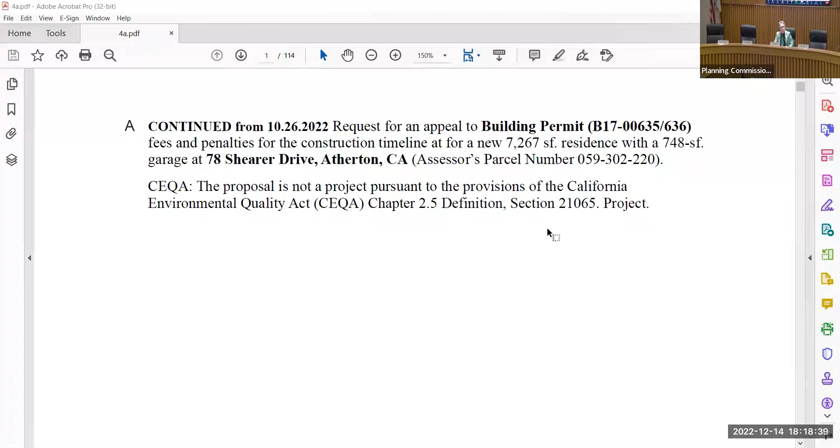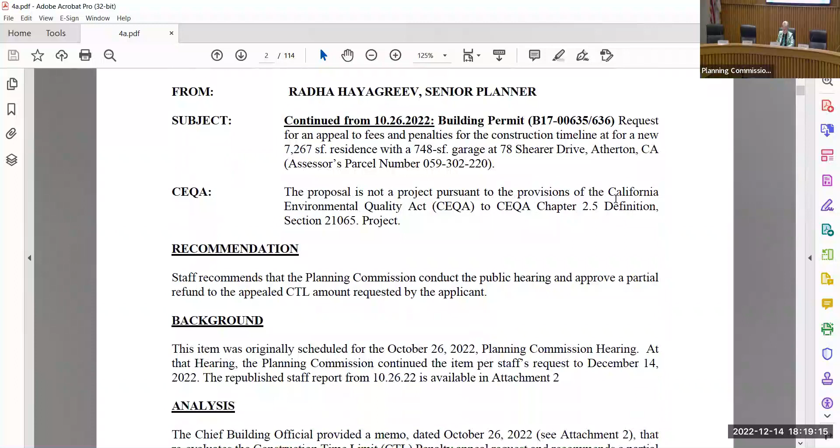Thank you, Chair Lane. I'm going to share my screen and walk you through the first item on the public hearing. The item is for an appeal to the building permit B17 for requested refunds to the fees and penalties of the construction timeline for the residence at 78 Shearer Drive. Staff had brought the Planning Commission report on October 26th. The chief building official is with us tonight to speak more about the project, its history, and the timeline. Tonight, staff recommends that the Planning Commission conduct the hearing and approve a partial refund based on the evidence and the revised memo the chief building official has provided for our review tonight.

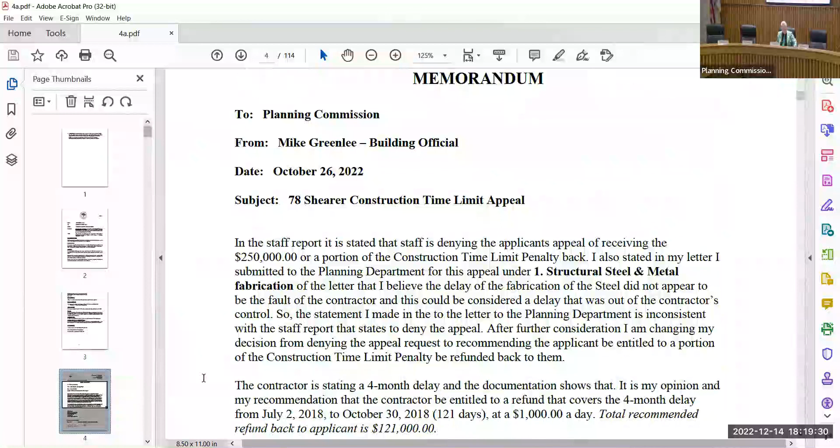The recommended request of the refund was for the entire amount of the $250,000 penalty that the applicant had to pay for exceeding the construction timeline pursuant to the Atherton Municipal Code.

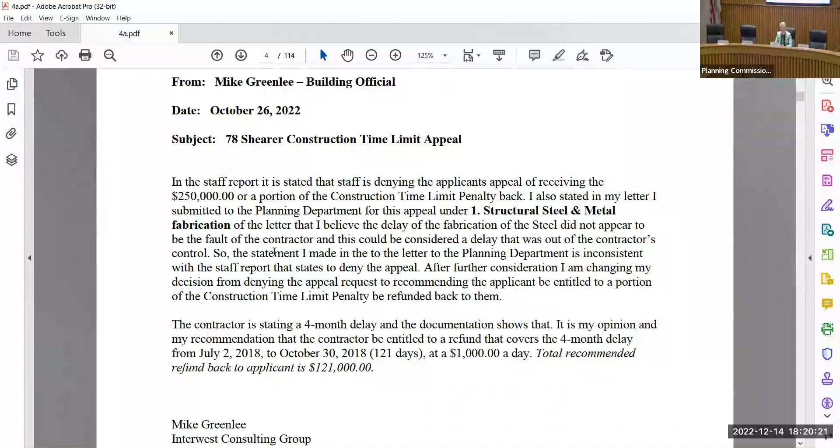The request is for the entire amount, correct. The chief building official's memo is in front of us right now, and his position on this project, after reviewing the evidence sent to him by the applicant regarding the structural steel and metal fabrication delays they had to incur, which was not their fault, is a revised recommendation. Rather than denying the appeal of the entire amount, he has recommended and approved a partial refund of up to $121,000.

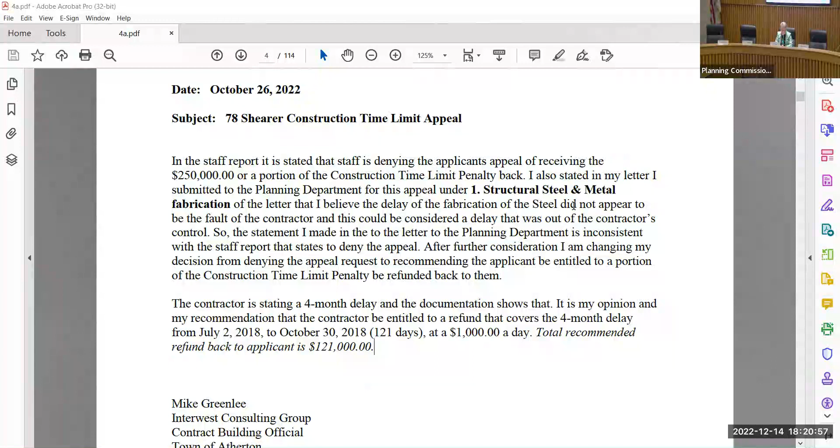Okay, hello, my name's Mike, hold on. Okay Mike, there you go. Yes, this is Michael Greenlee, go ahead and introduce yourself for the people in this room too. Yes, my name's Michael Greenlee, I'm the building official. Can you turn it up? We're not getting enough volume in the room. Just a minute, Mike. All right, go ahead, Mike, go ahead.

Good evening, my name is Michael Greenlee, building official for the town of Atherton. I've been the building official here for over 11 years. I've never been on site for this project at 78 Shearer, though I've driven by it. I've never met the contractor or anyone on site, so I communicate with the inspector about what's going on out there. This project is about 8,000 total square feet. It started in October of 2017, and the original CTL timeframe was October 19th, 2020. When COVID hit, we made adjustments back in 2020. Myself, the city manager, and the city attorney came up with a COVID-19 CTL update to allow a little more time, and for this project they got an additional 139 days to complete. But it went well beyond that, about 450 days past the adjusted CTL. With COVID, this project started about two years and four months prior to COVID.

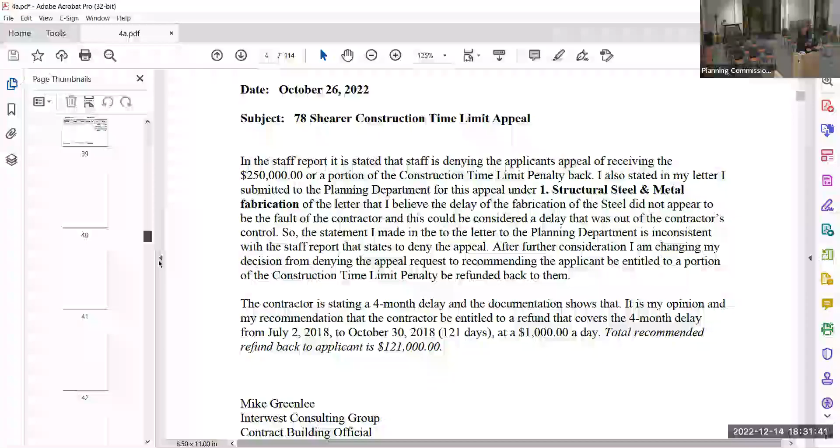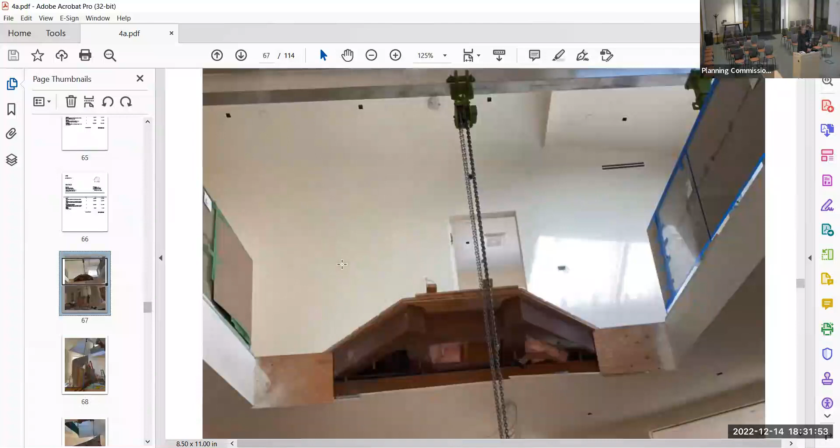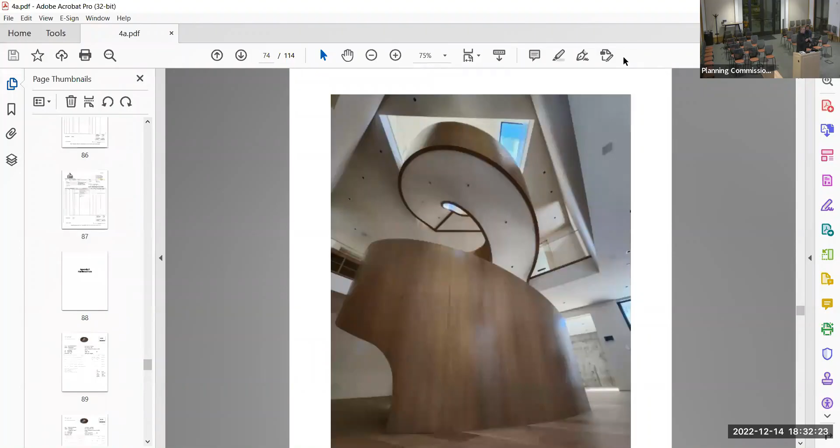Finally, in October of 2020, almost a year after the order was placed, they said they're going to ship this out in a couple of months. It finally got to the port in Oakland in December of 2020, 14 months after we ordered it. But the shipment could not get out of the port - it took a while.

Meanwhile, the installers were supposed to come from Germany, and they told us that because of COVID they can't get a visa. So we tried to request a special work visa for them from immigration, but that failed. So finally, they decided they can't come in, and we needed to find somebody in this country to put together that staircase.

It is an artistic piece - it's not something I could go in front of Home Depot, grab somebody, and have them put that staircase together. We looked everywhere in this country, and finally found a very small company, one person who's extremely artistic, who took on the job. He started it at the beginning of 2021 and finished by the beginning of 2022 - it took him almost a year to build.

I included some pictures of the process, of what that staircase looked like. Without that staircase being completed, we could not secure a final inspection. You can go up and down the stairs, but you can't get a fire inspection, you can't get a final inspection. So that's one of the things - all 7 things that I put in that package - that's one of them.

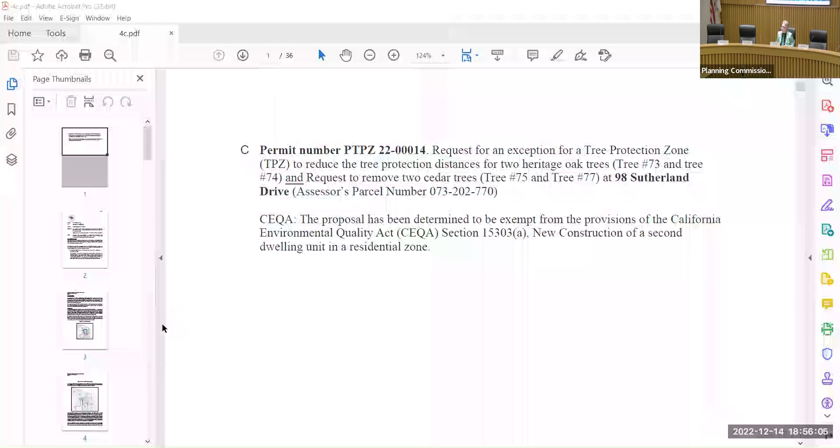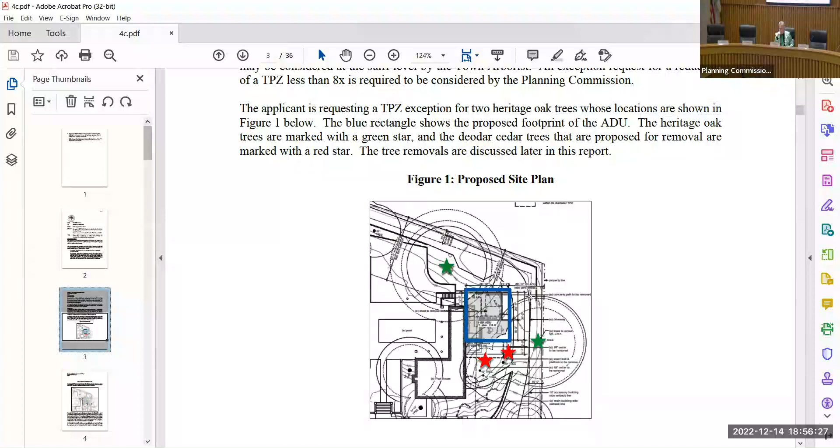I'm sharing my screen to zoom in on the particular project and the TPZ exception. What you see in front of you is the site plan. The rectangle shown in blue is a proposed ADU, and the project's location here is impacting two trees shown in green stars. The TPZ exception area for these two trees, which is impacting the structure of the ADU, is shown in blue on this map.

Town arborists met with the applicants multiple times, and planning teams have met with the applicants for various iterations for alternative location and possibilities. This seems to be the right spot for the ADU, however it is surrounded by trees. The applicant is also requesting removal of the two trees shown by the two stars.

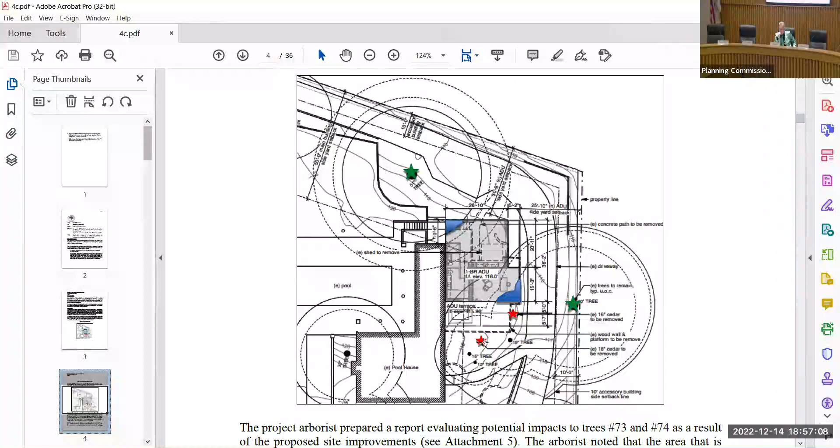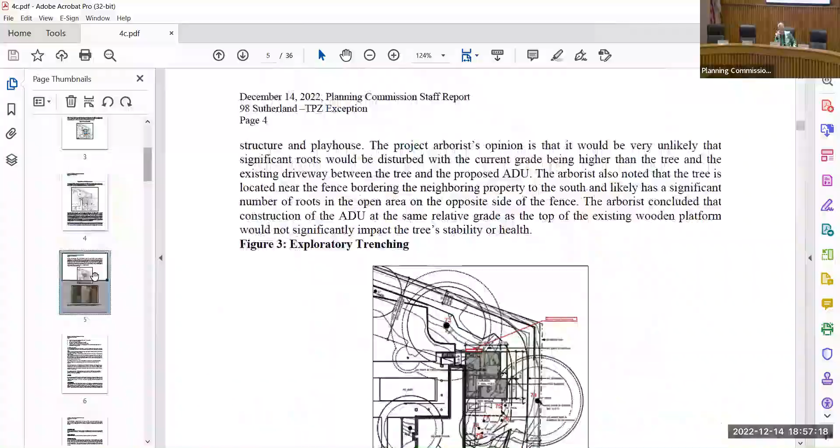The town arborist has reviewed the applicant's arborist report and also paid a visit to the site. There has been exploratory trenching to give her the information she needs. She's with us tonight to speak about her recommendation, and I can summarize.

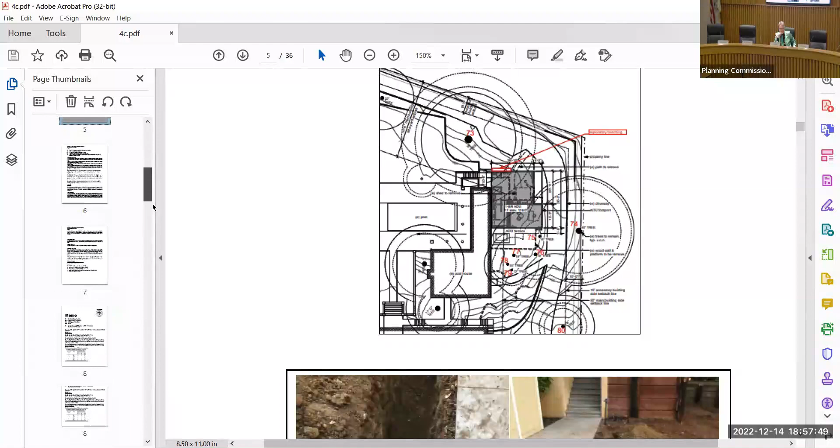She approves the TPZ exception of these two trees, number 73 and 74. She also approves removal of one of the trees, but she denies the removal of the other cedar tree. I would like to hand over the mic to Sally to speak more about this item. Planning staff is backing the town arborist report and recommendation at this point to the planning commission.

All right, Sally, you want to go? Yeah, so I felt I could recommend the two TPZ zones because one tree is across the driveway, and the other tree is further away and down the slope. There's also an existing platform in the location where they want to build this.

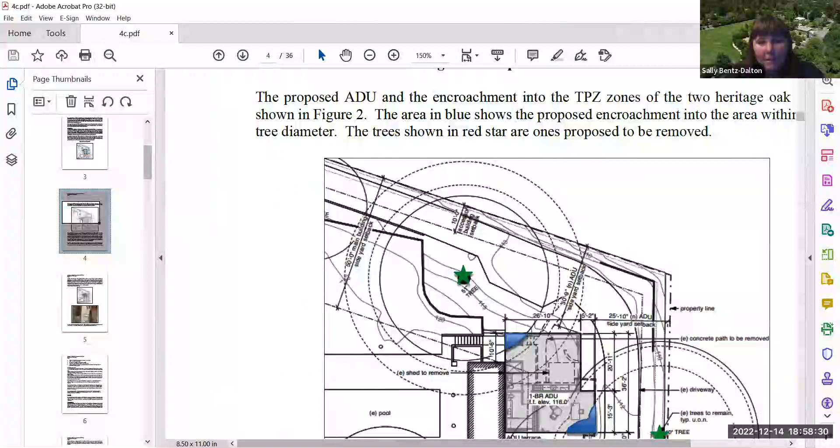So you'll see on the plan, the tree to the right, the green star, that's across the driveway. The other one is down the slope. I don't know if you can see on the plan, but there is an existing platform here with the new ADU.

I think they only found one root, which was a 2-inch root. So they didn't find any large roots when they did their exploratory trenching.

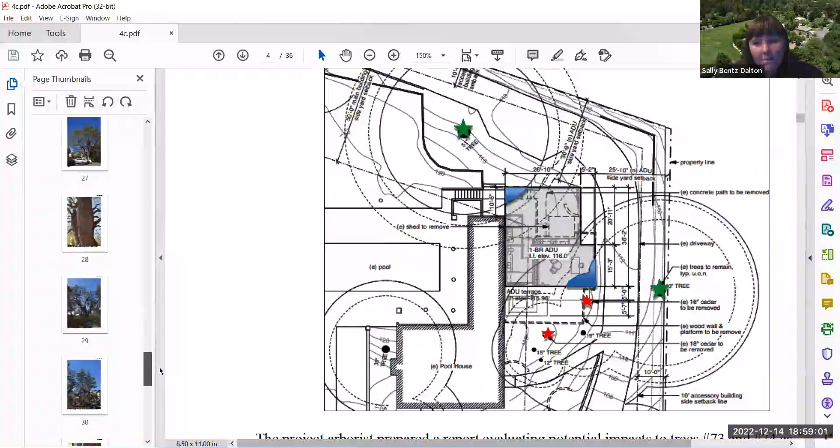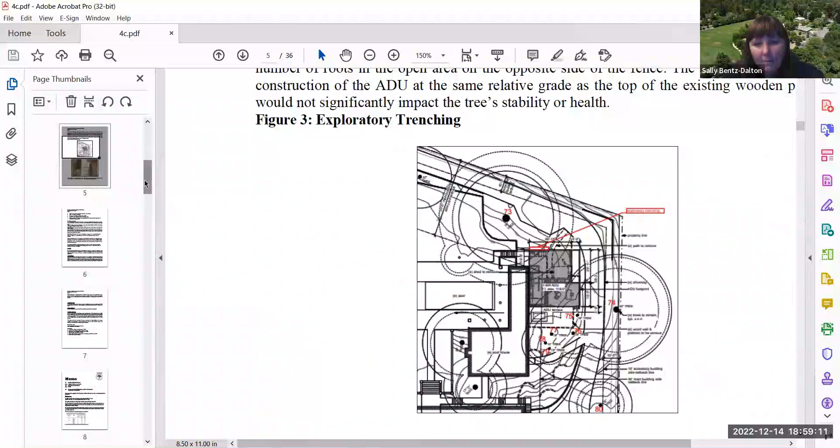The square footage of the ADU was larger, but to comply and make it no less than 6 times, they made the ADU smaller. And that's the...

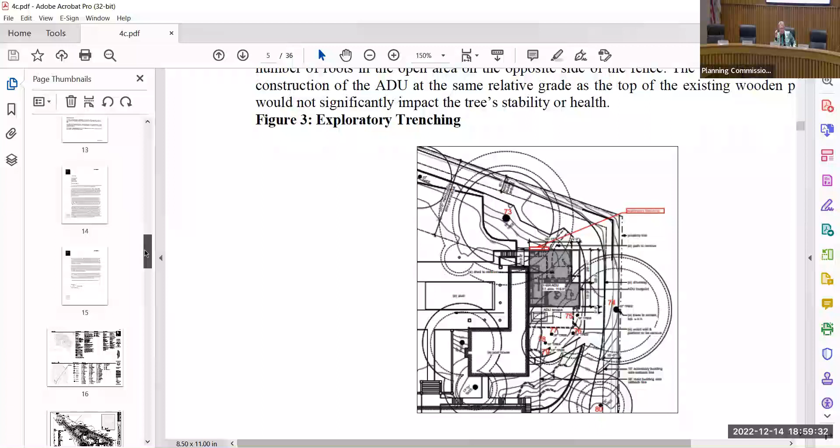The 6 times is because of tree 77, or because of one of the green trees? I think it was for tree 70, the one to the far right. Okay, 74 or whatever it was. Okay, yeah, all right.

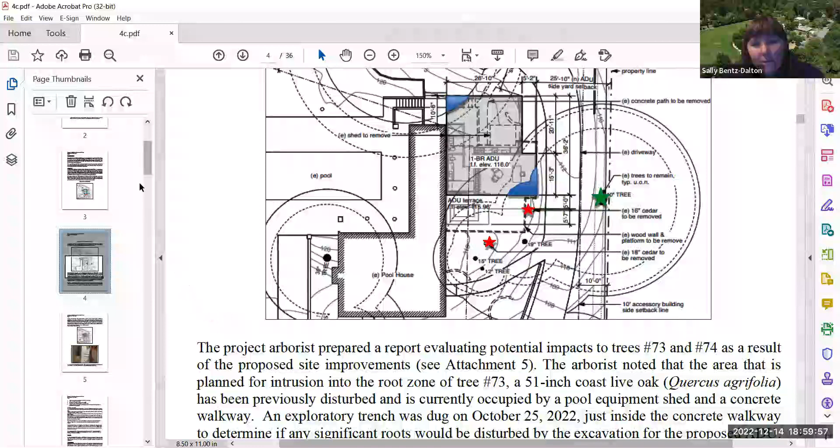The tree I denied is 10 times away, so they don't need a request for that one. The reason I approved the one tree is because most of the foliage is on top of the tree, it's top heavy. The vigor was less than the tree that I didn't approve. It's pretty crowded over there, and it's also right next to the driveway on a slope. So I felt that one could be approved.

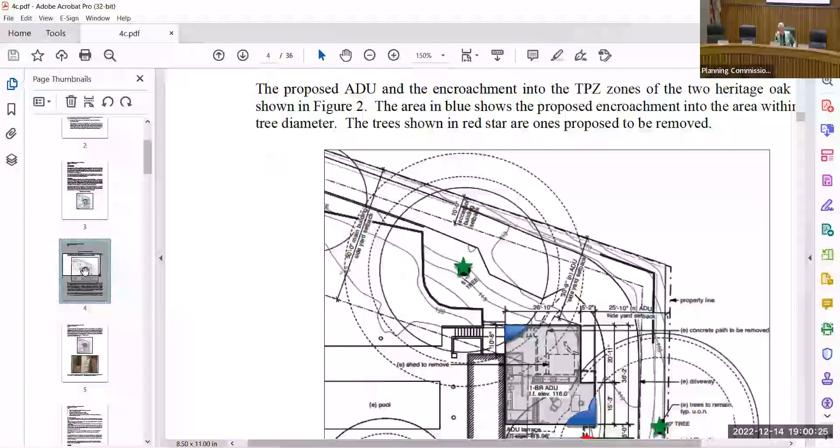So I had a question on tree 77, the one you wanted to retain. It looks like it's awfully close to the existing house, and it doesn't look like it's going to be anything other than a top heavy tree, because no branches can actually grow down low due to the house. So it looks to me like that's a poorly placed tree as it exists.

Yeah, I mean, if they're going to have a reason because it's too close to the house, they would have to show some type of damage to the house. So in this case, I just didn't feel they had a strong argument to remove the tree. But of course, if you visited the site, you would see that it is close to the house.

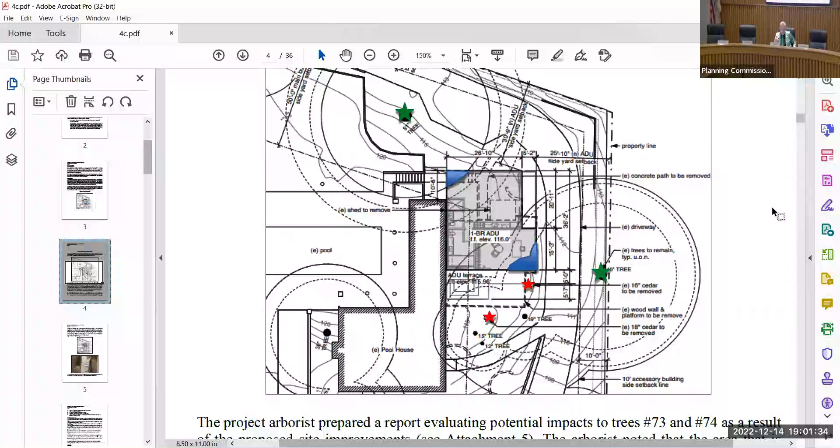What I'm thinking about is there's two things about it: the proximity to the house, which is an issue with coming fire codes and things like that, but I'm also looking at whether the tree will ever actually be healthy, because of the way it has to be shaved over halfway to keep it from impacting anything on the ground, just to have a top that's sitting there looking like a tree, with the bottom looking like a stick. It's never going to be a healthy tree, even if it's existing okay, right?

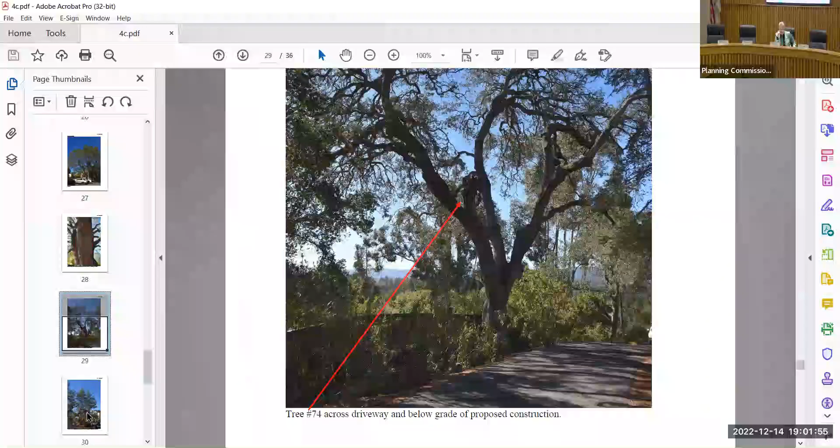It would never be able to have full balance to it, is that correct? I mean, it's more balanced than the tree that I approved, but yeah, they also pruned it up, which isn't always best for the trees either, because then they're less balanced. As it's standing there today, it's something I wouldn't typically approve.

Okay, all right. Any other questions? Did you have anything else, Sally, that you wanted to cover on that? No, that's all. In this picture, you can see the platform that's existing there with the fake grass on top.

And that kind of grass is pervious, right? The water flows through that, so it doesn't stop water from going to the roots, right? It's supposed to, but it's not as permeable as you would think. That's why I asked, because I know some of them aren't as free flowing as they advertise.

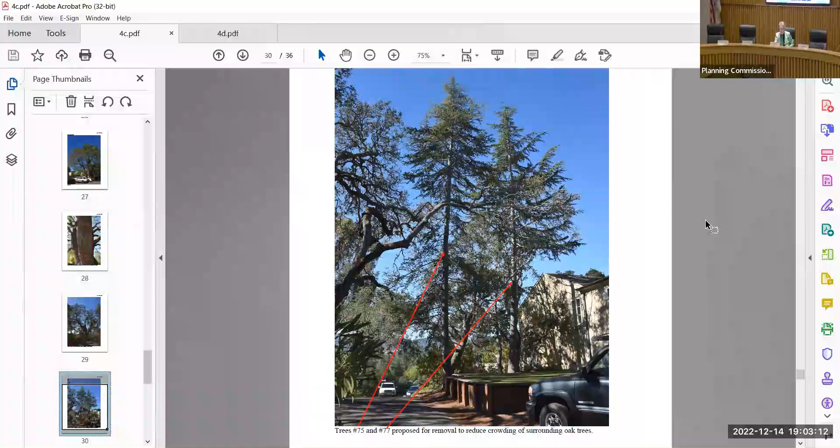All right, any other questions of staff? No, thank you. All right, then I'll go ahead and open up the public comment section. We'll start with the applicant. Where is the applicant?

Hi, this is Maurice Lombardo with Taylor Lombardo Architects. Oh, there you are. Hi, I can see everybody now. Love the tie, by the way. Happy holidays.

I think Sally did a great job presenting this, and we did a lot of research, looking at every possible site for the ADU. We think this is a perfect site location for it. And I agree, those two cedar trees would be great to remove both of them, because there's a lot of vegetation and trees already around this property.

The elimination of those two trees, I don't think would impact the amount of landscaping that's there right now. We'd certainly be up for adding additional landscaping beyond the driveway toward the fence. We did a lot of work analyzing this. We think the ADU looks good, and with the removal of those two trees, I think it'd be a benefit for the ADU. And this is Fanny, who also worked on the project with me.

I just want to add, one of the main reasons we suggested the cedar tree removal is so that it gave us a little more room to create better landscaping in terms of screening for the occupants of the ADU.

Right now, it's really hard to do anything other than low-level shrubbery. Any mid-sized planting just gets crowded out by the existing vegetation around there. So we're trying to clear up the space a little bit and help with the pool house maintenance issue, because it requires quite a bit of maintenance. I think the owner and the previous owner have been doing that, but it is very close to the existing pool house, so it will be very helpful.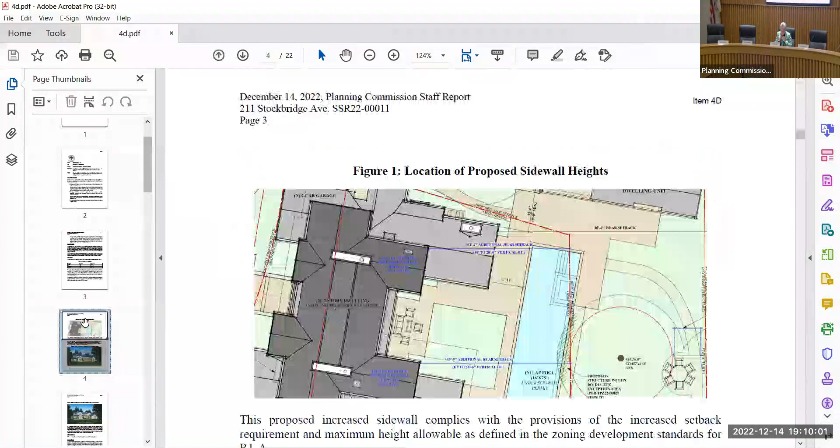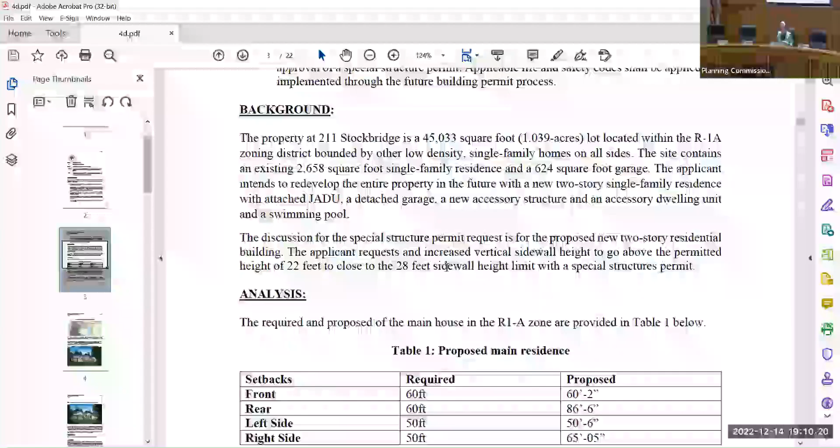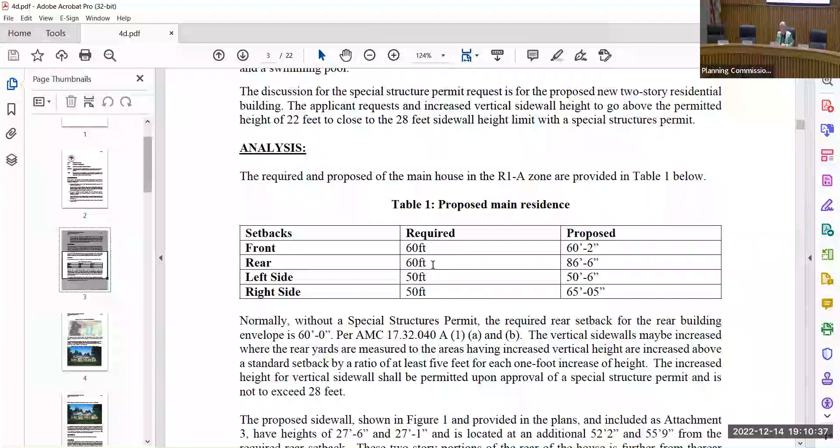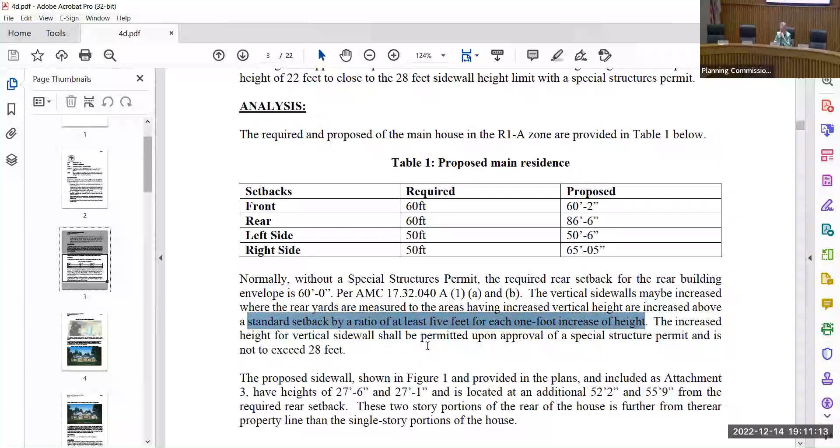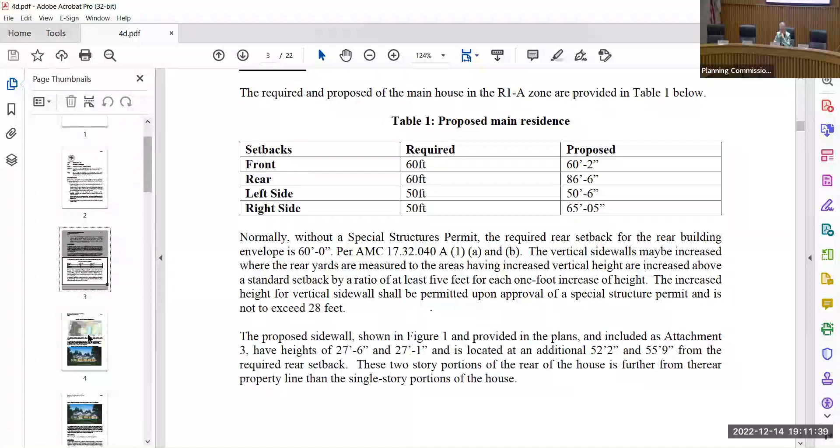The standard ratio that the municipal code recommends is: if the sidewall height needs to go taller by 1 foot, they have to provide over a 5-foot increase in the rear setback. The maximum allowable sidewall height without the special permit is 22 feet, with a 60-foot required setback. However, the applicant is seeking 27.5 to 27.1 feet, which is about 5 feet taller than the maximum allowable sidewall height. They are complying with the required increased setback.

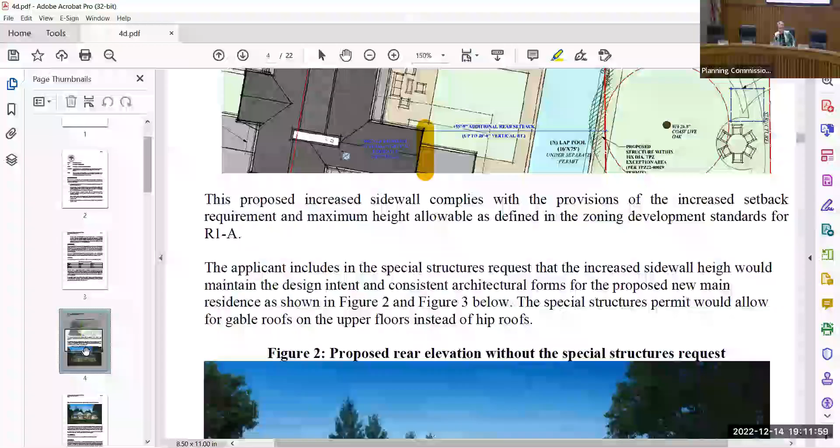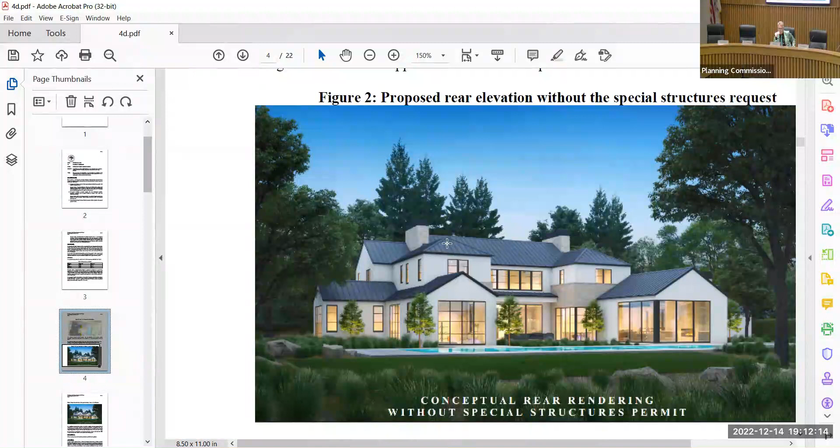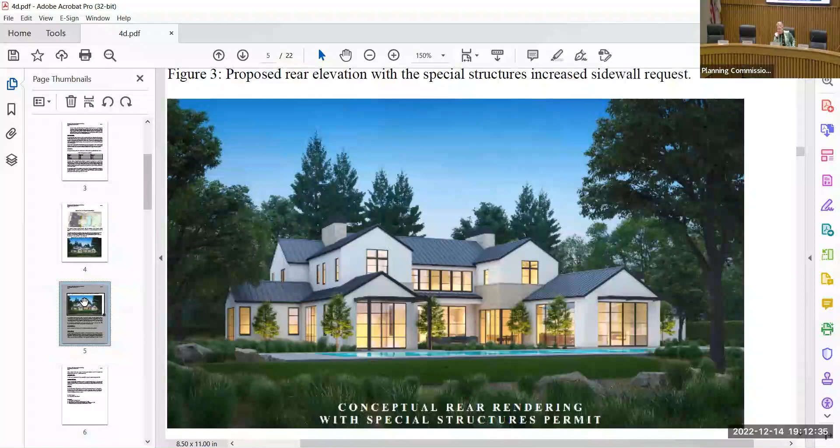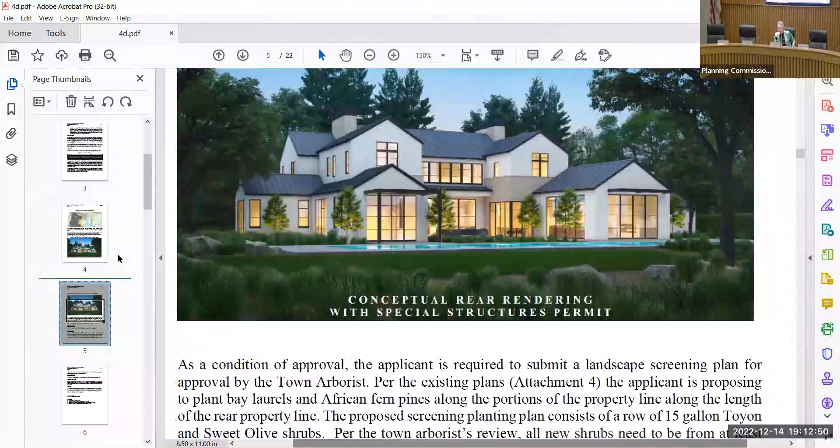When we visited the site and looked at the neighboring properties, one issue that came up was that, if the planning commission approves the higher sidewall, staff is requiring the applicant to submit a landscape screening plan, because this property line at the far end has visibility to the neighbors. The applicant has provided a landscape screening plan for our review as part of this item's attachments. However, the town arborist recommends that the applicant work with her to revise the screening requirement to conform with the heritage tree ordinance requirement.

The current screening plan proposes 15-gallon shrubs. The required size is a 24-inch box. Staff concurs with the town arborist's review.

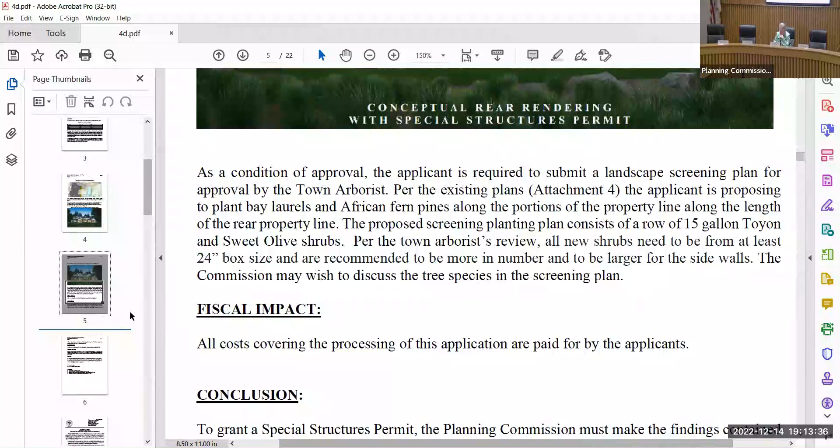Based on what you see and what you've heard, staff is recommending that we approve this rear sidewall increase to maintain the architectural integrity of this design. And that ends my presentation.

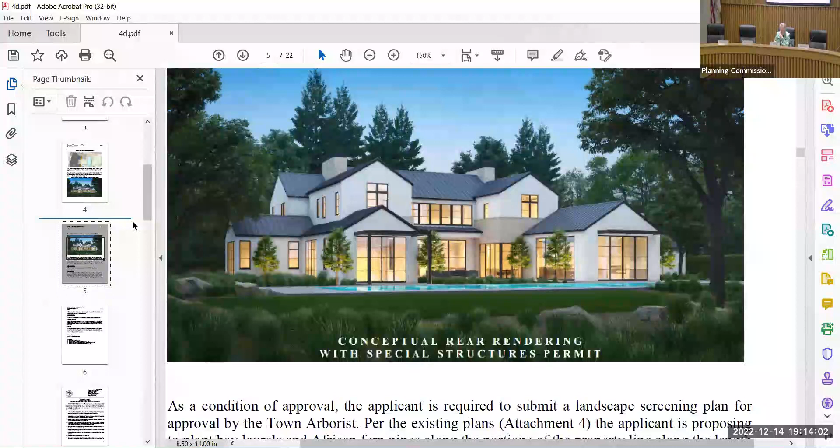We have the applicants here with us on the call. Do you have any questions of staff on this one? No, thank you.

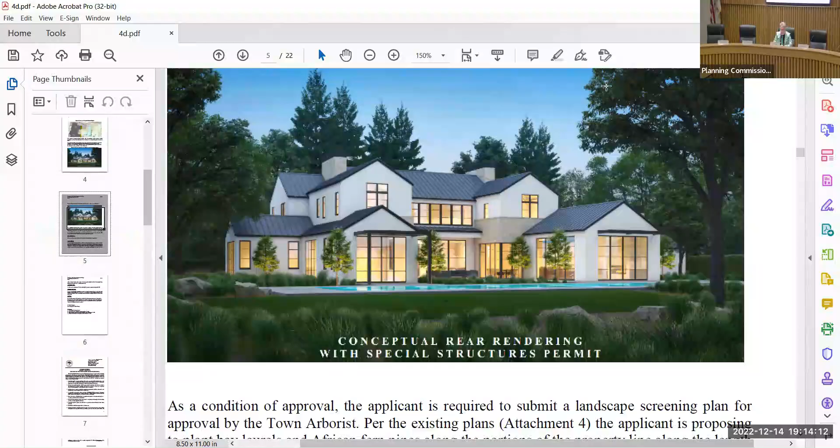We'll hear from the applicant or the representative next, so I'll open up the public comment section. Good evening, Mr. Chair and members of the commission. My name is Steve Simpson, I'm the architect for the project. Can everybody hear me okay? Yes, Steve, thank you.

I think staff did a great job of explaining it. I just want to expand or reiterate: what we're really asking for here is just to change two elements, the roof line. The walls don't get any taller and the house doesn't get any taller with this proposal. We originally developed the house like this and had a different interpretation of the architectural projection zoning aspect, and found out staff's interpretation was a little different. So in order to conform, we changed those two elements to a hip roof, but we'd really like to do the gable roof because it ties the whole house together better. So the overall house does not get taller, the walls don't get taller, the ceilings don't get taller, nothing else gets taller. It's just a change from a hip roof design to a gable roof on those two elements. I'm happy to answer any questions.

I don't have any questions. Any questions? No questions, thank you. All right, anyone else here to speak on this item? I don't see anybody popping up.

Go ahead and close the public comment section and bring it back to the commission for discussion and action as appropriate. This one looks pretty straightforward to me. The setback takes care of it along with the screening, so I'm fine with it.

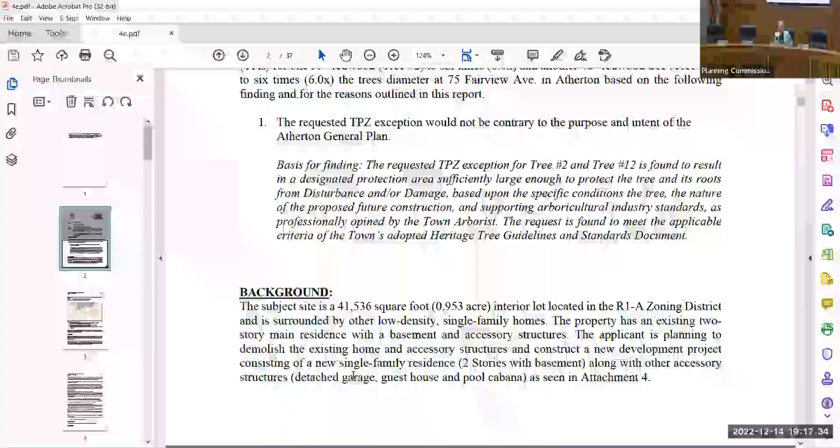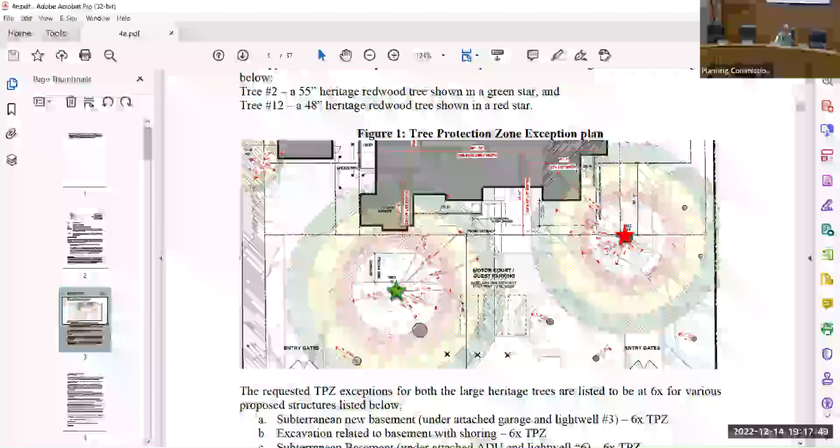Thank you, Chair Lane. This is a TPZ exception at 75 Fairview Avenue. This is an incoming project for a brand new residence—this is an incoming project for an ADU, I'm sorry, my bad. The ADU proposed is shown and hatched in the plan in front of you, and the tree protection zones are for these two trees as highlighted. I would like to invite Town Arborist Sally to speak more about this project because she has had more detailed discussion with the applicant. We do have the applicant on the call too.

All right, very good, Sally, take it away. You might be on mute. Sally, can you hear me? Yep, now we can. About a year ago, you looked at one similar to this one. This is for two TPZ exceptions, for tree number 2 and tree number 12.

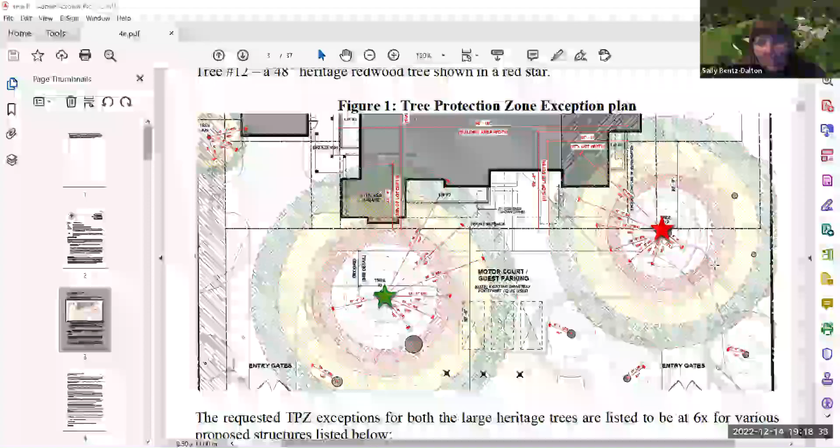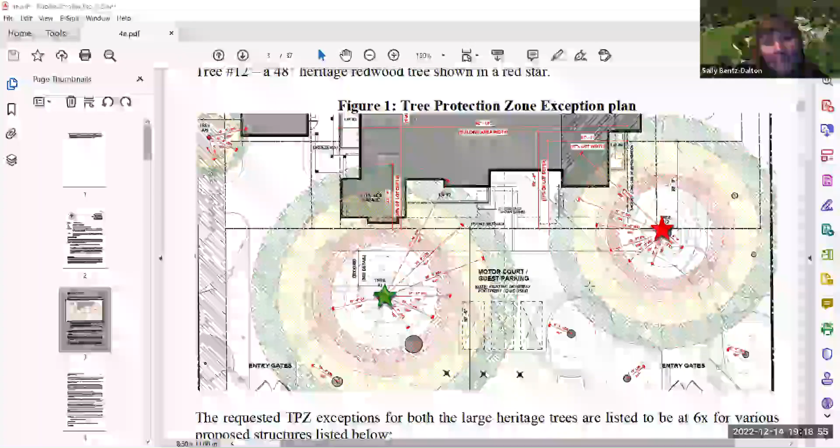The existing house is closer to where these two large redwoods are located. These redwoods are pretty big, so I feel like it would be hard to build anything without asking for an exception. And again, the existing house was

approximately 10 feet closer to the trees than what they're asking for. The applicant will do shoring in the locations at 6 times, so they don't have to dig closer than that.

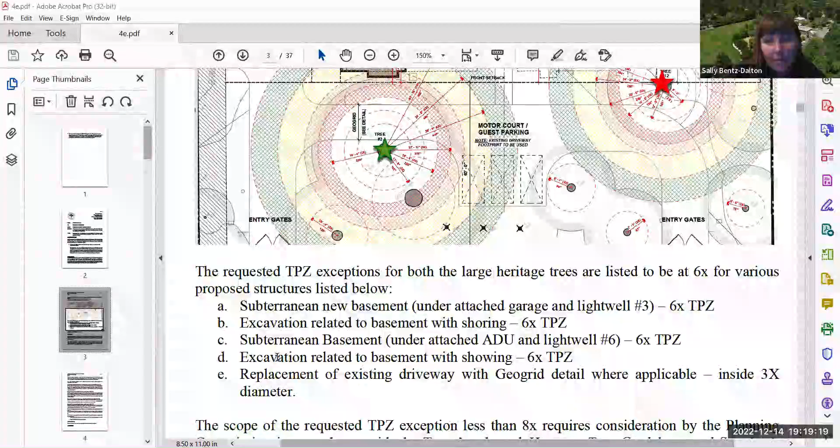And if I recall, underneath the attached ADU, light well number 6, only one root of 2 inches was found. And then in the other location, no roots over 2 inches were found.

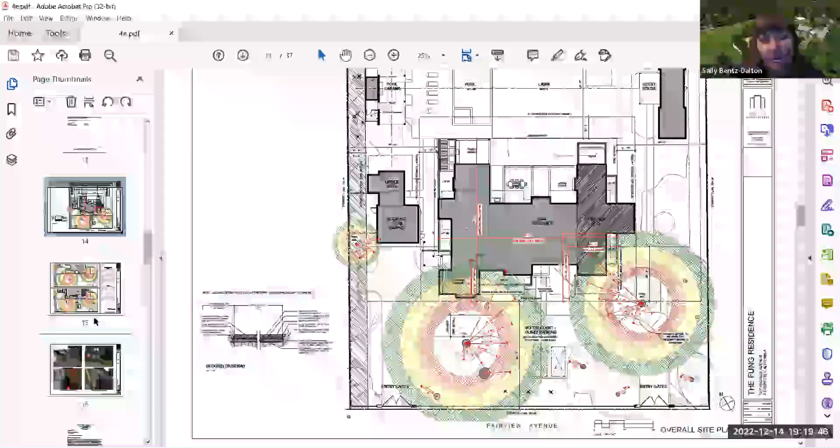So I think overall, because of the location of the existing house and because of the techniques they're going to use, which Sean can talk further about, and because the trees are so large, I felt like it was okay to approve this at 6 times. Typically, I wouldn't approve something at 6 times unless there was an existing structure.

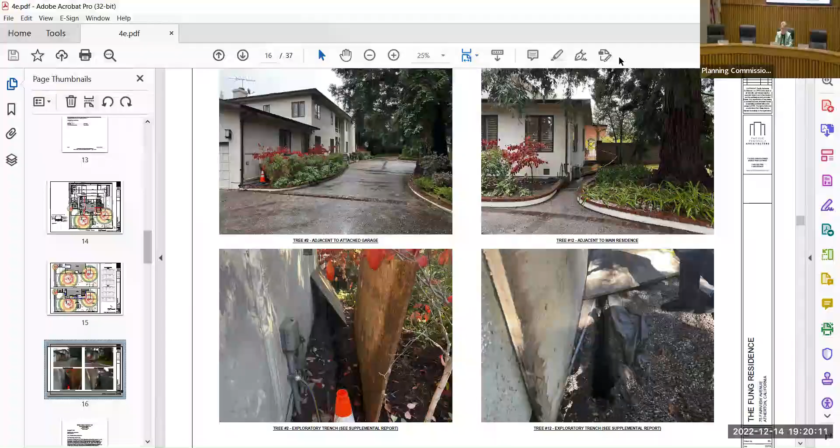Hi, my name's Sean Lopes, project architect here, representing our client. Thank you, Sally, for your presentation. To follow up on that, this is for a new single family residence, including a basement as well as an attached ADU.

So the first thing we do when laying out our site plans is kind of do a TPZ overlay. And the first thing we noticed is that these large redwoods take up majority of the front portion of the property. So at that point, about a year ago, we met with Sally and discussed using the existing home as the measuring stick for our TPZ distances.

So when creating the project, we looked at utilizing an attached garage in the existing location of the attached garage to further alleviate any additional development around the roots.

And then along the attached ADU, we're looking at actually setting the building back 10 feet back from the front property line and about 6 feet in from the side property line to actually alleviate the root impact on tree number 12.

And lastly, we're utilizing the existing driveway footprint, and we will be installing some geogrid details to, again, help alleviate future movement of the driveway and give the roots for tree number 2 some more breathing room as well. All right, John, if you have any other questions, I'm here to answer them.